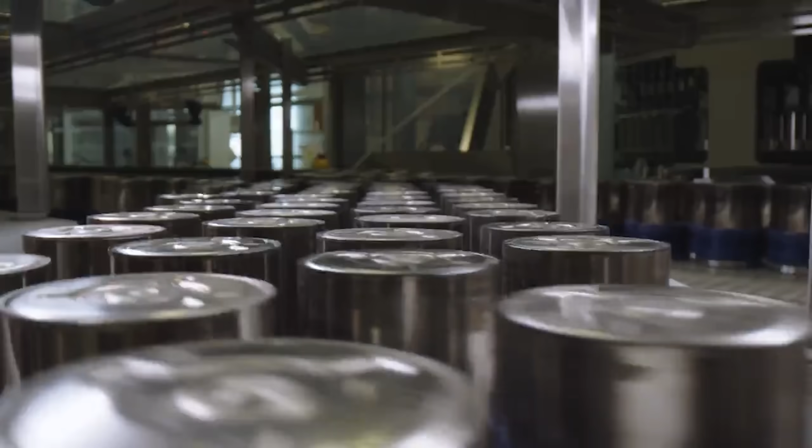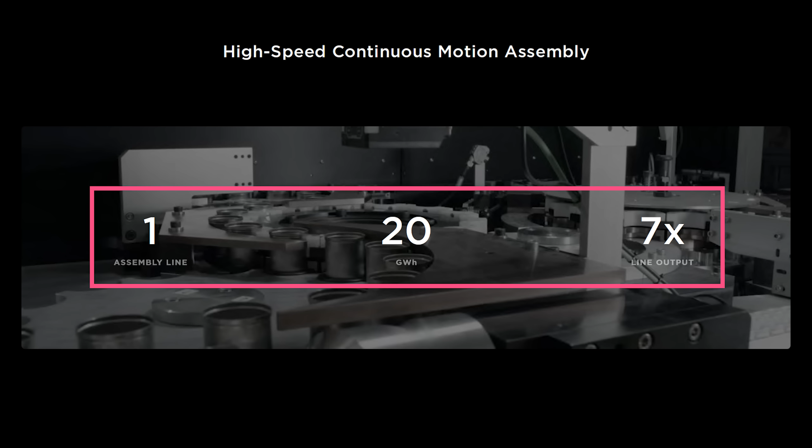In Tesla's Q3 2023 earnings call, Drew Baglino made a statement about the 4680 production ramp that contained a lot of new information. Today I'm going to break down what he said line by line, what the implications are for the 4680 ramp, and what the impact could be on Tesla's cost of goods sold. In short, after 3 years of waiting, it appears 4680 cell production is finally poised to deliver on the exponential growth and cell cost reductions that were teased at Battery Day.

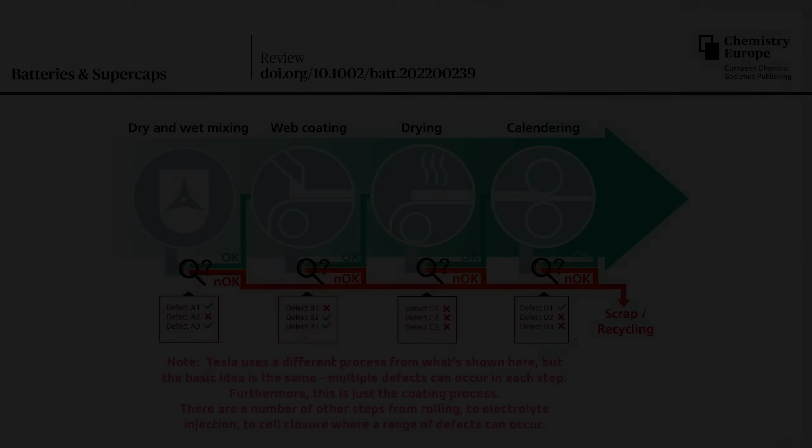It's par for the course for new battery lines that a lot of material ends up in the dumpster for the first year or 2 of the ramp. That's because, as I've said in the past, the components within battery cells are the thickness of a human hair, which makes them difficult to manipulate at high precision and speed. That means a lot of ways for defects to occur and a lot of scrap until things get dialed in.

So why is Tesla's current focus on quality or scrap rates and cost rather than cell volume? My guess is that there's a few factors involved. First, their current production rate is higher than what's needed to support the ramp of the Cybertruck. As this video from Joe Tegtmeyer shows, there's very few Cybertrucks currently coming off the production line. Meanwhile, the 4680 lines are producing enough cells for about 500 to 1,000 Cybertrucks per week.

So, although they are continuously increasing the production rate of the 4680 line at Texas, they currently have the breathing room to focus on quality because they're ahead of the Cybertruck ramp. The focus on quality will mean further reductions in scrap rate, and therefore reductions in cell costs to help improve the profitability of the Cybertruck ramp. Lastly, what are the steady-state cost goals that Drew referred to? I can't speak to what their short-term goals are, but later in the video we'll talk about their long-term goals, when they might hit them, and the implications.

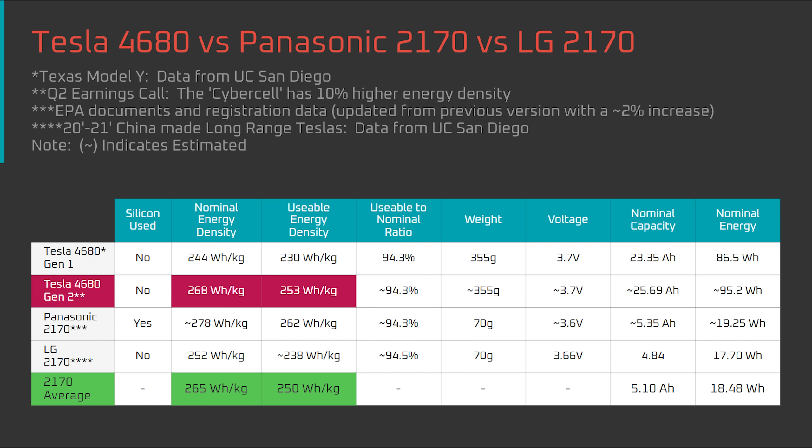Drew's next comment was, quote, the Cybertruck cell with 10% higher energy density than our Model Y cell started production on line 2 in Texas, end quote. The 10% energy density increase is old news from last quarter, and if you'd like to know more about that, check out my last quarterly update video. The comment that production started on line 2 in Texas is new information and is very useful for assessing the ramp of the 4680.

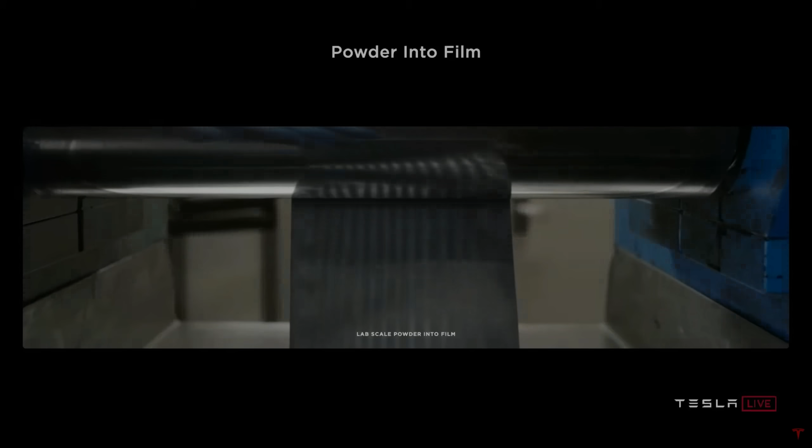It confirms that the 10 and 20 million cell milestones they hit in June and October were for the most part from just one line. That matters because it means they're getting all the new technologies they unveiled at Battery Day dialed in on the first line. And now that they're copying that line, the ramps of the subsequent lines will happen rapidly.

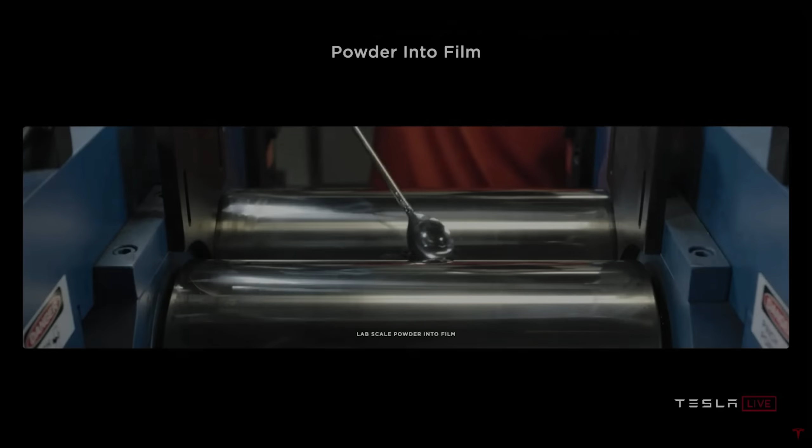On that note, many people are interpreting Drew's statement that the Cybertruck cell is starting production on line 2 to mean that the first line wasn't running the Cybertruck cell. I took Drew's statement at face value, and I don't believe he was implying that line 1 is running a separate version of the 4680. Let's take a look at Drew's next statement to explore that further.

Drew said, quote, "This quarter, we convert to building 100% Cybertruck cells to simplify and focus the factory as we ramp all 4 lines in phase 1 over the next 3 quarters." End quote. The interpretation many people are making of this statement is that line 1 is producing an older version of the cell and will be converted this quarter. However, I have a different view. Let's start by taking a look at the history.

I was able to get a hold of one of those cells early last year from the Kato Road facility in California, which I sent to UC San Diego for a teardown. It's also the cell that Sandy Munro found in the Model Y from Texas, at a time when the 4680 factory at Texas hadn't started production yet. That is, we know the Generation 1 cell was definitely produced at Kato Road, and there's no evidence that Generation 1 cells were produced in Texas at a volume and quality sufficient for vehicles.

Beyond the cells and packs that were torn down, there's also circumstantial evidence that Kato Road was the only location where the Generation 1 cell was produced. In mid-September, CleanerWatt reported that Tesla was shutting down 4680 production at the Kato Road facility for upgrades. And within the same week, we saw Tesla pull the Model Y from their order page that we know contained Generation 1 4680s. That reinforces the idea that Kato was the sole source for Generation 1 cells that went into vehicles.

On the other hand, as I said earlier, there is evidence that Tesla intended to produce the Generation 2 cells at Texas with a new cell can based on displays at the cell line at Giga Texas. In light of that information, my view is that the 20 million cells produced on line 1 in Texas all used the Generation 2 architecture, and that line 1 doesn't need to be converted because it's already producing that cell. So when Drew says they're converting to building 100% Cybertruck cells this quarter to simplify and focus the Texas factory on ramping all 4 lines there, what did he mean?

If Giga Texas had to use both Generation 1 cells and packs and Generation 2 cells and packs in the same facility, it would add unnecessary complexity with no additional benefit. It would make more sense to use the Generation 2 cells produced in Texas for all vehicles produced in Texas. That's not to mention the cost savings from moving the packs around the factory rather than shipping the Generation 1 cells 1,700 miles from Kato Road in Fremont, California.

What if I'm wrong and line 1 in Texas does need to be converted from producing Generation 1 to Generation 2 cells? If that's the case, there's a chance the 5 gigawatt-hour run rate that was likely reached in October could plummet this quarter. That's because they would have to upgrade line 1 in Texas from a battery cell can that's crimped to a battery cell can that's laser welded.

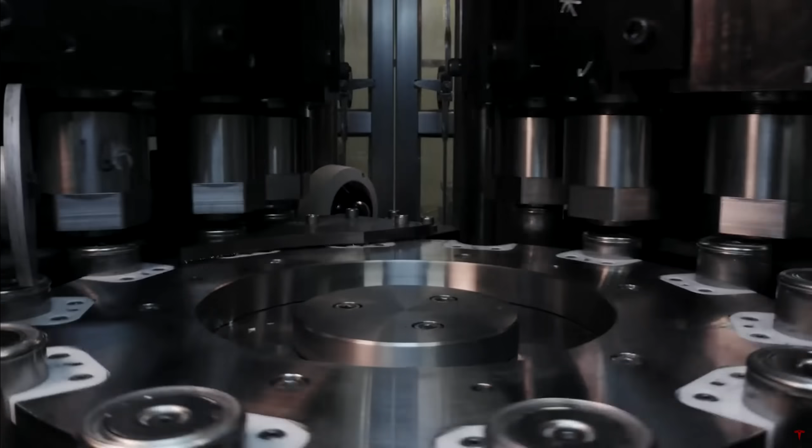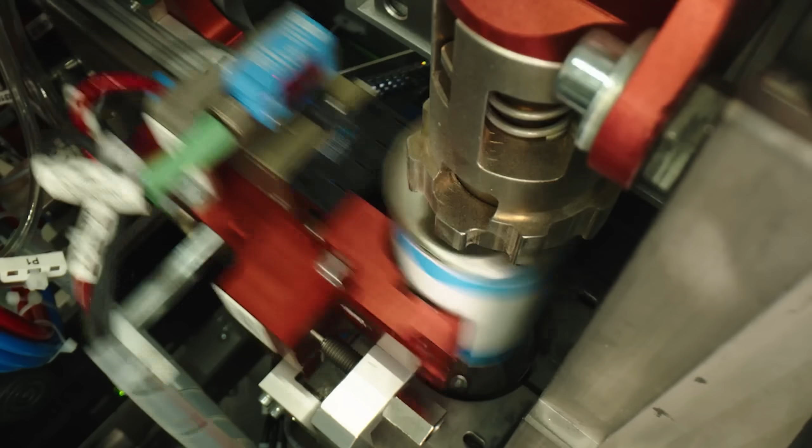That sounds simple conceptually, but in reality, it would be a big undertaking. I can't see a scenario where it wouldn't mean shutting the line down, replacing the necessary equipment, and recalibrating all the machines for a different cell design with a different number of parts and slowly re-ramping production.

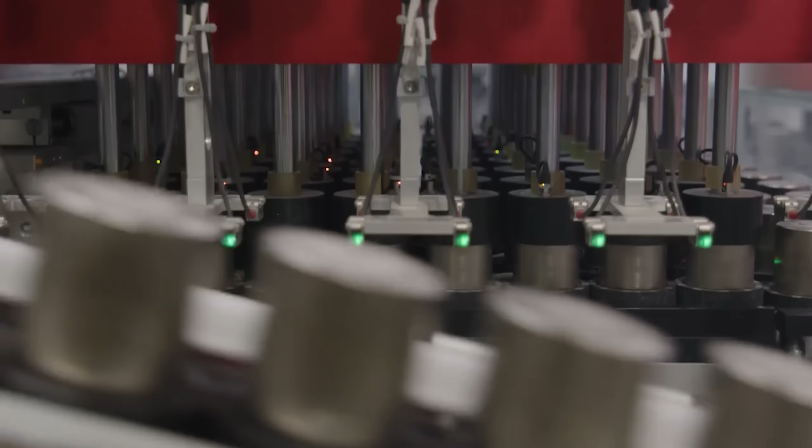If Tesla's lines were capable of rapidly shifting between cell designs, I would expect that their Kato Road line would be that adaptable as well. However, that doesn't look like it's the case if it's going to require retooling for the next generation cells.

With all that in mind, I'm left with the conclusion that it wouldn't make sense for Tesla to have spent the last year ramping the first 4680 line at Texas, only to retool it now, just as the Cybertruck is ramping. It makes more sense that they've now got line 1 running well, and they're now copying it to line 2, rather than ramping both lines on a new cell design.

Drew's next comment was, quote, Phase 2 of the Texas 4680 facility is currently under construction. The additional 4 lines incorporate further capital efficiencies over Phase 1, and our target is for them to start producing in late 2024. End quote. In other words, Tesla is expecting the 4 current lines at Texas, which have a total production capacity of 100 gigawatt hours, to ramp quickly enough that they're already lining up the next set of production lines. I'll cover that further when we get to my updated projections.

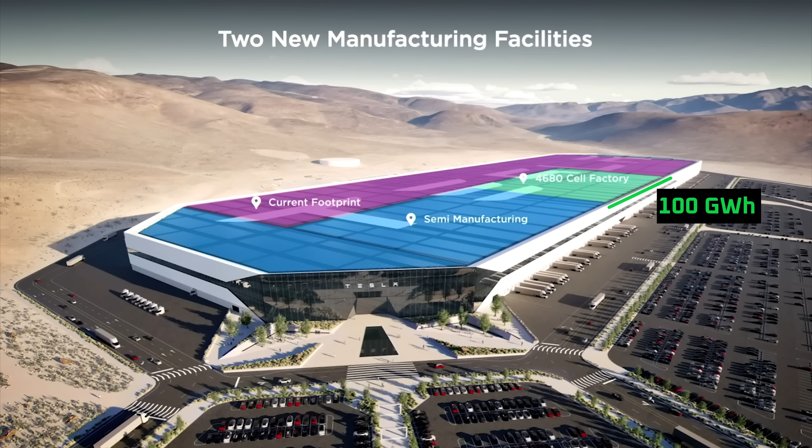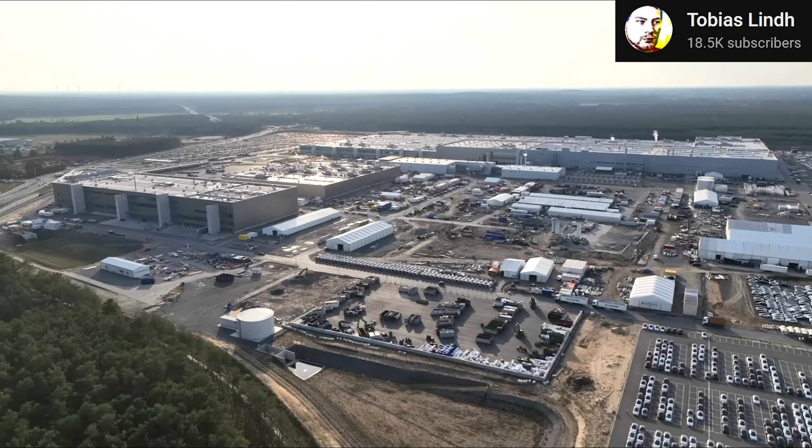First, Tesla has 100 gigawatt hours planned for Nevada. I don't expect that production to come online until 2025 because the factory hasn't been built yet. As for Giga Berlin, we do know that Tesla originally planned to ramp 100 gigawatt hours there. But there's no indication from the last 9 months that 4680 lines have been or are being commissioned there. That may be because it makes more sense to focus on US production due to the massive tax incentives there. So for now, I'm going to count Berlin out for cell production ramps for the next year or two.

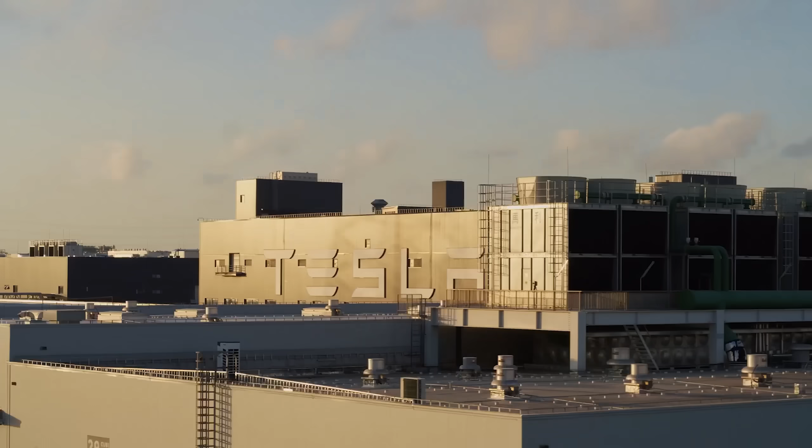That assumption could be wrong, but if Tesla provides updated guidance in an upcoming earnings call, I'll update the table and cover it in my quarterly video. Shanghai is a different story. There's plenty of battery capacity being built in China, and the cell and pack prices are low there. So Tesla doesn't necessarily have to build 4680 production in China at any time in the near future and can focus their energy elsewhere.

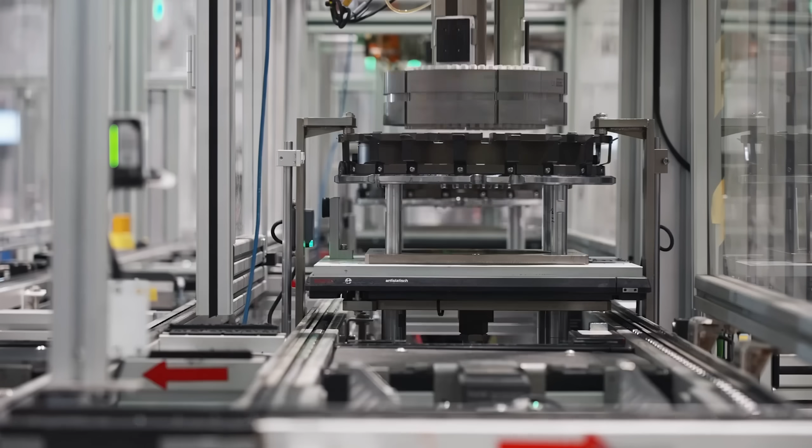So overall, between Texas and Nevada, there's about 300 gigawatt hours of 4680 capacity planned in the next 2 to 3 years. And that doesn't include any additional capacity that Tesla is sure to use from third parties. To put that production capacity in perspective, Tesla will probably only use about 150 gigawatt hours of battery cells this year. So 300 gigawatt hours will give them several years of runway. With all that in mind, I don't expect Tesla to have any cell constraints in the next 2 to 3 years when they choose to ramp products like the compact vehicle, Cybertruck, and Semi.

Moving along, Drew's final comment was, quote, Lastly, in Kato, we're retooling to enable large-scale pilot runs of our next-generation cell designs. Kato's long-term goal is to be the launch pad for new cells, 1 generation ahead of our mass production facilities, enabling faster iteration and smoother ramp-ups of new cell designs. End quote. There's 3 major points here. First, the Generation 1 cell line in Kato Road will need downtime for retooling to produce next-generation cell designs.

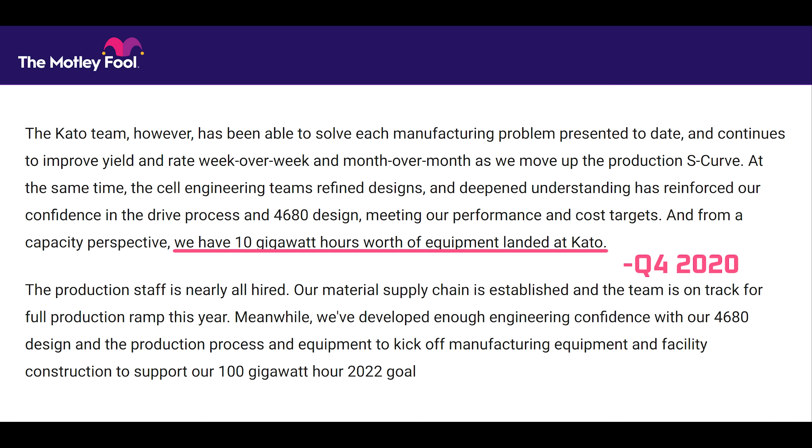Second, what do they mean by large scale? My guess is that the upgraded line will still have the roughly 10 gigawatt hours of capacity that Elon advised of in the Q4 2020 earnings call. It would be impressive if they could expand that beyond 10 gigawatt hours, but it wouldn't necessarily provide much additional benefit if they're just using the line for test runs.

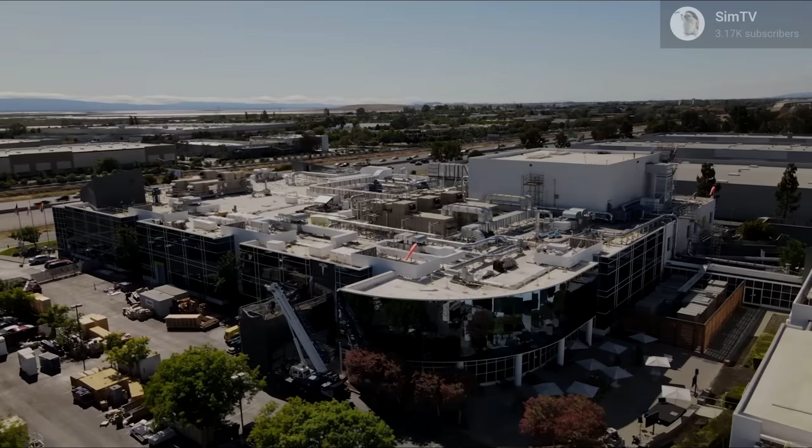Third, what are the implications of Kato Road becoming a launch pad for new cells? As a bit of background, in the past, Kato Road was a research and development facility rather than a production facility. The 10 gigawatt hour pilot line was built at Kato Road because that's where some of the earlier development took place for the 4680.

But based on my interpretation of reporting from CleanerWatt and from Tesla's earnings calls, it appears that the pilot line at Kato Road ran into unexpected issues that may have forced the final development of the 4680 production process to occur in Texas. So, in the interim, Tesla leaned on the pilot line at Kato Road to mass-produce 4680 cells for use in the Model Y.

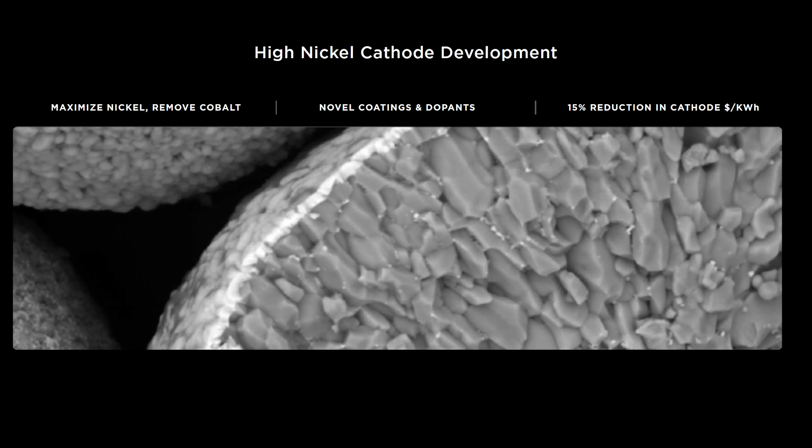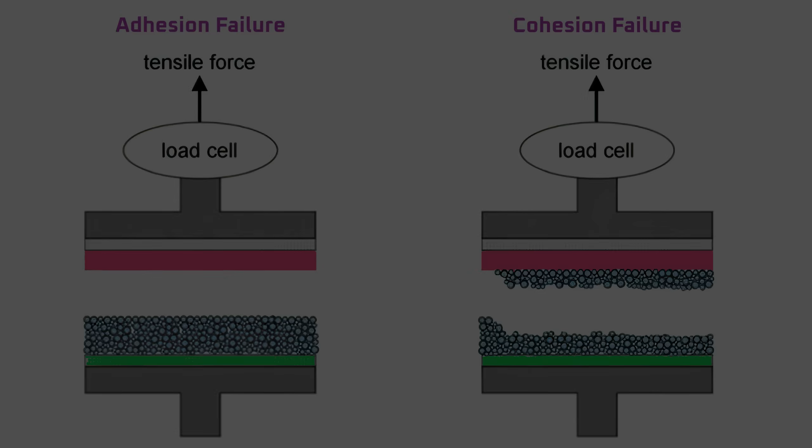What Drew is saying here is that it will no longer be used for mass production and can go back to focusing on R&D. What kind of R&D? In my view, the main focus will be on chemistry improvements. So far, Tesla hasn't focused on improving the cell chemistry of mass-produced 4680s because the focus was on just getting 4680 production working. That's because even slight changes to cell chemistry can cause dramatic changes to things like the cohesion and adhesion of the active materials in the battery cell, which in turn can mean weeks to months of adjustments to the production process to consistently produce high-quality battery cells.

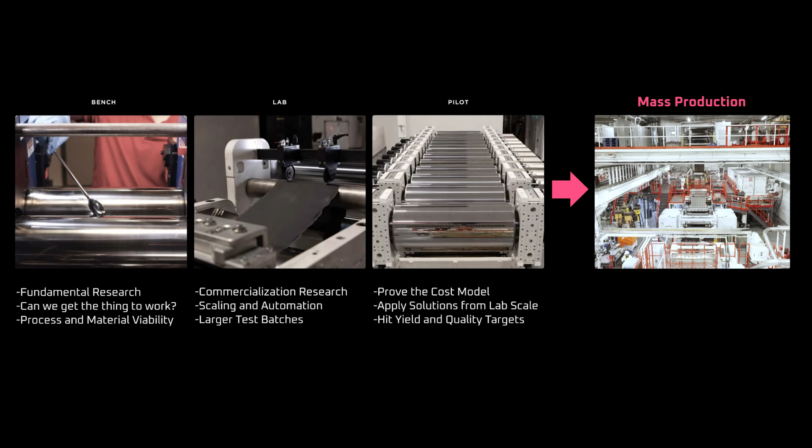Now that 4680 production is going smoothly in Texas, the 10 gigawatt-hour pilot line at Kato Road can be used to work those kinks out of new chemistries on production-scale equipment before passing them along to Texas and other locations for actual mass production. That should allow relatively seamless production ramps for new chemistries after they've been tested on the equipment at Kato Road. As for the impact of the chemistry changes, as I pointed out in my last video, they could easily push the energy density of the 4680 above 280 watt-hours per kilogram, and potentially above 290 watt-hours per kilogram in the next few years.

However, Tesla did give guidance in the Q2 2021 earnings call that there was around a 50% chance that they would hit a 100 gigawatt-hour run rate by the end of 2022. That means their guesstimate from mid-2021 is looking like it'll be about 2.5 years off if they manage to hit a 100 gigawatt-hour run rate in late 2024 or early 2025. Although Tesla was over-optimistic about the 4680 ramp, and that was nail-biting and frustrating at times, it looks like they're on track now, and it's quite an achievement.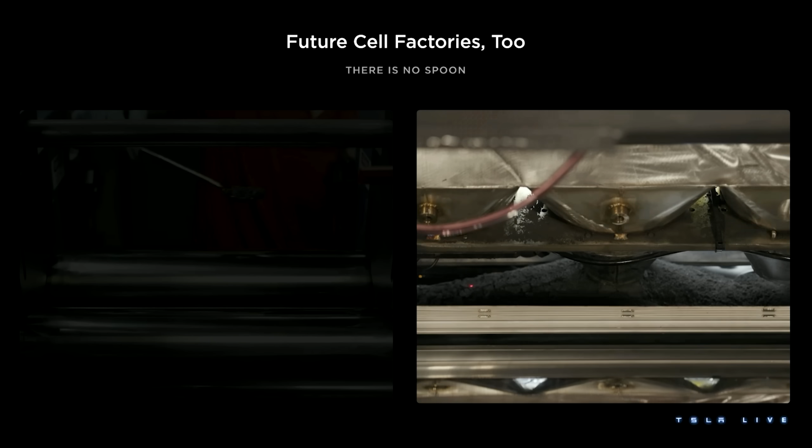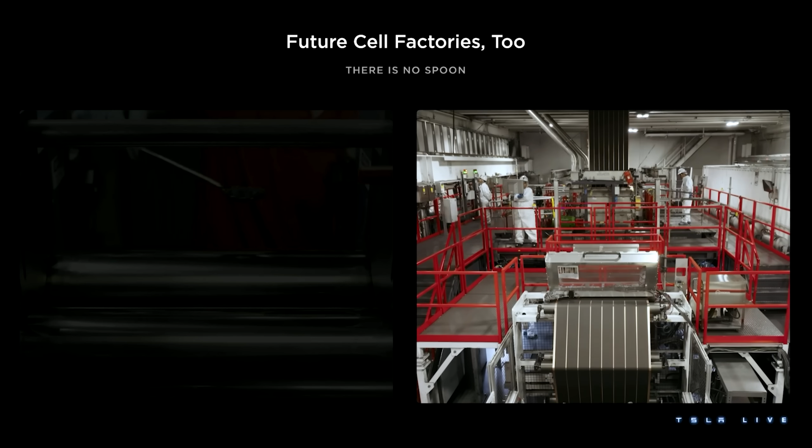Overall, even at this early stage in the 4680 ramp, they already have what's probably the most productive battery line in the world, and it's using a dry battery electrode coating technology that wasn't expected to hit the market for at least another couple of years. If they can continue to ramp the first line at Texas and rapidly clone it, then we'll finally see the explosion of battery cell production that was expected in the last 2 to 3 years after Battery Day. On that note, let's do some projections and guesswork on where things are going next.

As I showed earlier, on screen is the original projection that I showed back in July that used a 21% improvement rate, which turned out to be relatively accurate. If the 21% improvement rate holds, Tesla will hit 30 million total cells produced in early December, 40 million in January, and then 50 million in February. Hopefully Tesla lets us know if they hit those specific milestones so we can follow along, but I wouldn't be surprised if the next update is a doubling, or 40 million cells, just before the next earnings call. We'll talk about the projections for deeper into 2024 in a moment.

Before we get into that, is continuing to project the 21% improvement rate into next year reasonable? The bull argument would be that Tesla's now reaching the steep part of the S-curve where output skyrockets, and that'll be compounded by the fact that Tesla is now starting to spool up subsequent production lines. As for the bear arguments, I see 3. First, as Drew said in the earnings call, the team is currently focused on quality. That could slow the 21% improvement rate.

Second, there may come a time in the next year or two that the 4680 ramp progresses so quickly that material supply becomes a challenge. For example, what if the 4680 ramp is dependent on the cathode plant at Austin or their lithium refinery at Corpus Christi and those projects run into delays? I imagine Tesla has fallback plans, but it illustrates the point. The factories and mines that support the 4680 ramp are as important as the 4680 production lines themselves.

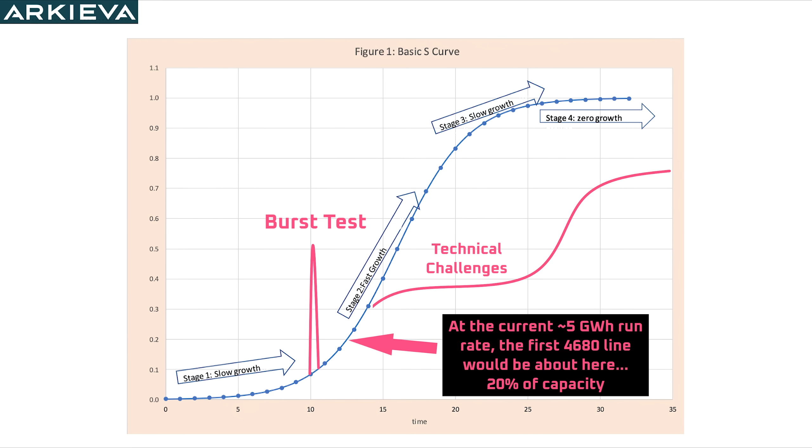Overall, in light of the bull and bear arguments, and given that there are so many other potential variables, my view is that the most pragmatic way to project the 4680 ramp is to look at past performance. With that in mind, I'll continue to use the 21% month-over-month improvement rate until we get new information or advice from Tesla. Now that we have a projection in hand for the production ramp, let's layer in some of the other information from the earnings call.

First, Drew said that the first 4 production lines would ramp over the next 3 quarters. Some people might argue that he meant that the first 4 lines would be fully ramped in 9 months. If that happened, it would be excellent news. But my view is that the intent of his wording was to set up the next sentence, where he says that the next 4 production lines from Phase 2 will start production at the end of 2024, which is 3 quarters from now. Let's look at why that is using the projection that we looked at earlier.

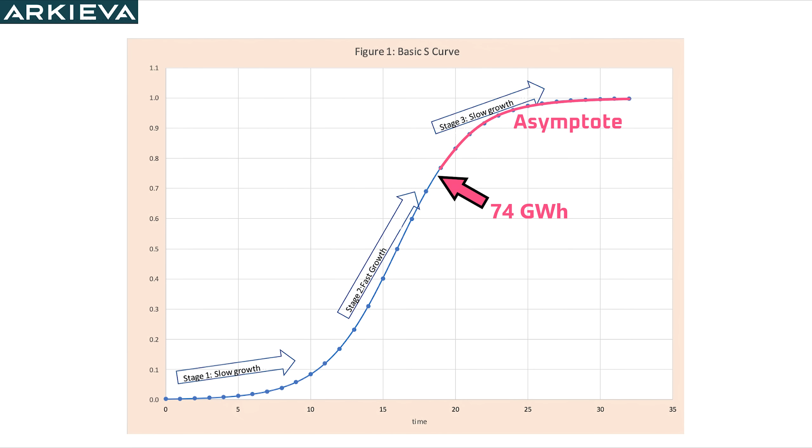At a 21% improvement rate, Phase 1 should hit a 74 gigawatt-hour run rate by the end of 2024. At 74 gigawatt-hours, Phase 1 will be 74% ramped, and at that point, the production S-curve will be starting to asymptote, meaning that the improvement rate will start to slow as Phase 1 reaches its nameplate capacity. So if Tesla wants a continuous ramp over the next couple of years, then I expect Phase 2 to start ramping before Phase 1 starts losing steam.

This is why I don't think Drew meant that Phase 1 would be fully ramped in 9 months ahead of Phase 2, which would effectively create a pause in production increases between the 2 phases. If that's correct, it leads me to believe that Tesla is also projecting roughly a 21% improvement rate, because they're planning on starting the ramp of Phase 2 when Phase 1 would be in the steepest part of the projected S-curve. That's when Phase 2 would need to start in order to create a continuous ramp.

The second piece of information to layer in from the earnings call is that Tesla expects to hit volume production of the Cybertruck in about 18 months. Even if Tesla was able to beat that timeline and fully ramp the Cybertruck by the end of next year, at an average pack size of 130 kilowatt hours and 250,000 vehicles per year, the Cybertruck line would at most be using about 33 gigawatt hours of cells per year in December of 2024. That's as compared to the projected 74 gigawatt-hour run rate of the 4680 lines in Texas.

In other words, even in a bullish scenario for the Cybertruck ramp, at the end of next year there could be around 40 gigawatt-hours of spare run rate for 4680 cells in Texas. If that happens, what could Tesla do with those cells? First, the margins of Tesla's energy storage products are currently 24% and increasing, while the margins for the automotive business are around 18% and falling. From that perspective, it makes more sense to use the 4680 cells to drive further cost reductions in vehicles, because that's where margins are the weakest.

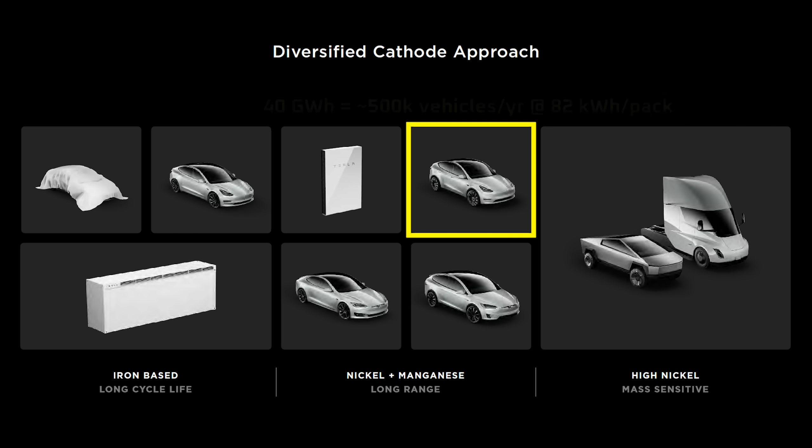Why not the Semi, upcoming compact vehicle, S&X, or Powerwalls? The Semi and compact vehicle haven't started their production ramps yet, and the S, X, and Powerwall don't have enough installed production capacity to absorb a 40 gigawatt-hour run rate of cells by the end of next year. That's as opposed to the Model Y and/or the Model 3, where 40 gigawatt-hours of cells would equate to roughly 500,000 vehicles per year. If Tesla delivers 1.8 million vehicles this year, they only have to grow production by 27% in the next year to absorb those additional gigawatt-hours.

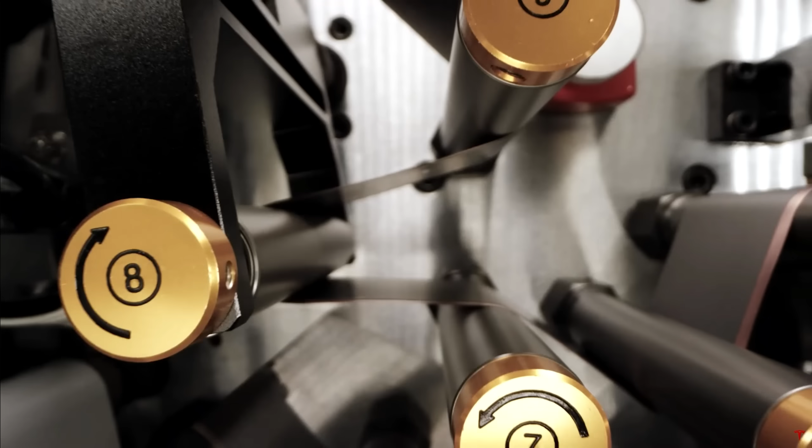With all that said, although it's interesting to talk about product-level choices, as an investor, my main concern isn't so much about which product each cell will go into, which I'm sure Tesla will make the right decision about, but rather how quickly the 4680 lines scale and how much that will reduce production costs. On that note, let's take a look at how much the 4680 cells could reduce the production cost of Tesla vehicles. We'll look at cost without Inflation Reduction Act tax credits, and then with those tax credits.

Currently, the average price for battery cells is around $100 per kilowatt hour. That means at the pack level, they're about $130 per kilowatt hour. Yes, Tesla might be getting a better deal, but we don't need to be exact here. The main purpose is to sketch out a rough guide for the impact of the 4680 on vehicle cost. If the average battery pack of the Model 3 and Y are 75 kilowatt hours, each pack currently costs Tesla about

$9,750. Tesla's current target for the 4680 is $70 at the cell level, which I estimate would make the pack cost about $90 per kilowatt hour. That would make the cost of a 75 kilowatt hour pack using 4680 cells $6,750. $9,750 for the current pack cost minus $6,750 for the 4680 pack would mean a savings of $3,000 per vehicle.

Bear in mind that Tesla's probably about 18 to 24 months away from hitting that pack cost because their $70 cost target is likely calculated based on a fully ramped production phase. But even when Phase 1 is early in the ramp, perhaps early next year, I expect the in-house cells will already be cheaper than third-party options. Regardless, if there's one question I have for the next earnings call about the 4680 ramp, it would be, when do they expect the 4680 packs to hit cost parity with the average third-party options?

Moving along, we still need to factor in the Inflation Reduction Act tax credits. For each kilowatt hour of battery cells that Tesla produces in the US, they're eligible for $35 in tax credits, as well as $10 for the packs, for a total of $45 per kilowatt hour. $45 per kilowatt hour times 75 kilowatt hours is a savings of roughly $3,400. If we add in the potential $3,000 of production cost savings, that's a total of $6,400.

Currently, Tesla's average cost of goods sold for their vehicles is about $37,500. $37,500 minus $6,400 for production and tax credit savings would make the new cost of goods sold $31,100 per vehicle. Or, looking at it another way, Tesla's current average selling price across all makes and models globally is around $44,000. To keep things simple, let's assume that applies to the average price for vehicles in the US specifically as well.

A $6,400 cost reduction might allow the average cost of Tesla vehicles sold in the US to drop to $37,600 if those vehicles used the 4680 cell, or about $41,000 if half the vehicles used the 4680 cell. That would considerably improve the margins of those vehicles and/or allow Tesla to drop the price by several thousand dollars.

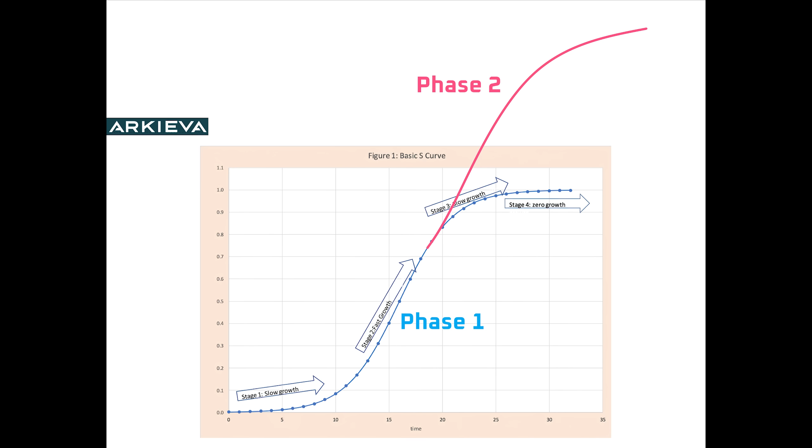In summary, nearly 3 years after Battery Day, it looks like 4680 cell production is ramping in earnest. Tesla isn't out of the woods yet, but the trajectory looks excellent, and the actions they're taking, like converting Kato back to R&D and starting on Phase 2 of construction at Texas, inspire a lot of confidence. I'll continue providing updates on a quarterly basis until they're no longer useful. But I have a feeling things will be getting more interesting in the battery space over the next 2 years rather than less interesting as Tesla rolls out more products, launches more production lines, and makes improvements to their battery cell technology.